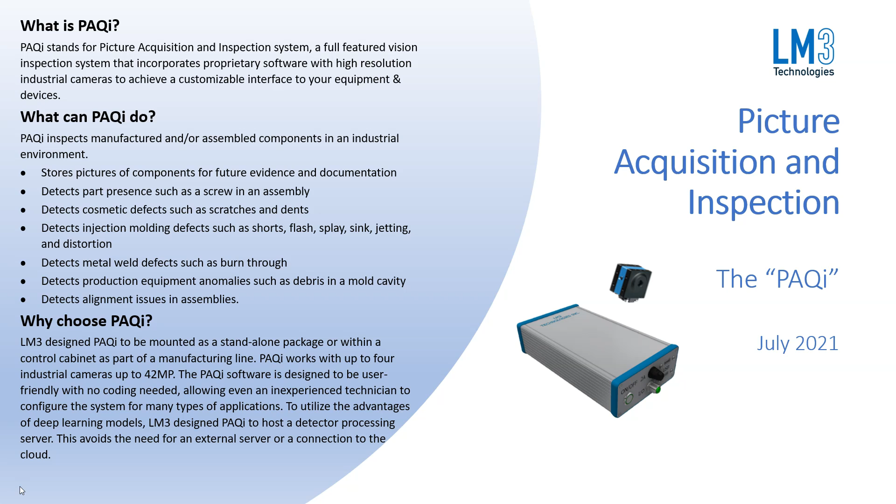The PAQi software is designed to be user-friendly with no coding needed, allowing even an inexperienced technician to configure the system for many types of applications.

So how does PAQi work? The initial setup can be achieved within minutes. The first step is to acquire images of your manufactured components.

Once images are acquired, they are processed through a program LM3 provides to label the images. After labeling, they are fed into an online training tool called QC Hero, using AI-based detectors that generate a trained detector capable of correctly identifying the labeled objects or images.

The trained detector is copied to PAQi, and a single button calibration is used to associate the detected objects with the expected objects in the images. This determines pass or fail. PAQi then operates on the line to do automated inspection.

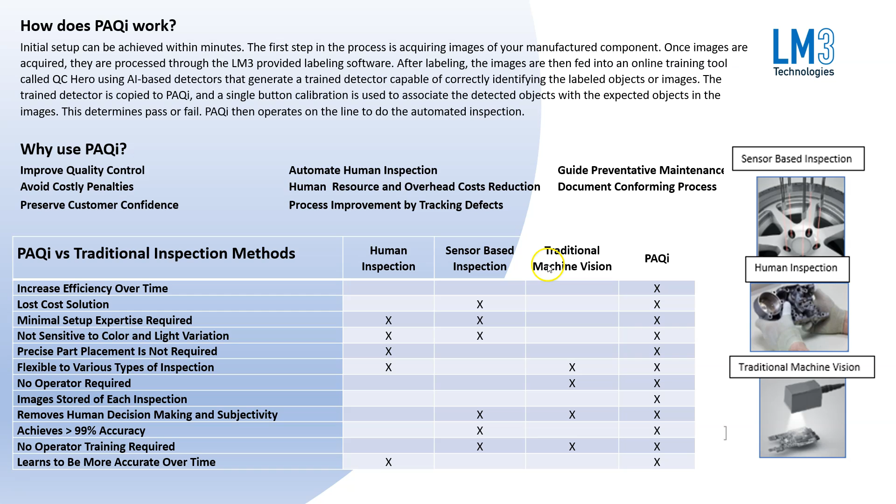Our customers include some very large corporations and some small ones as well, including Cooper Standard, Magna, Lear, Yanfeng, Bayer, Steelcase, CK Technologies, Cascade Engineering, and AGS, to name a few.

Here are the general system costs. A 10 megapixel single camera system starts as low as $5,500 with quantity discounts available. Additional industrial cameras, up to 6 total, can be added to the system for $750 each.

Because PAQi can do image acquisition using any kind of digital camera or DirectShow source, an inexpensive webcam can be used to reliably acquire images. Industrial types of webcams run at less than $150 each.

In order to do physical measurements, you will need to purchase a one-time NI VBAI license at approximately $850. QC Hero detector training is a pay-per-use web-based system at $20 per hour. A complex object detector usually trains in less than 3 hours, or $60 per session.

LM3 can be hired to do customization. LM3 provides affordable accessories including lighting controllers, I/O breakout boxes and cables, buttons, and LEDs to round out the system and avoid the need for high-cost integration.

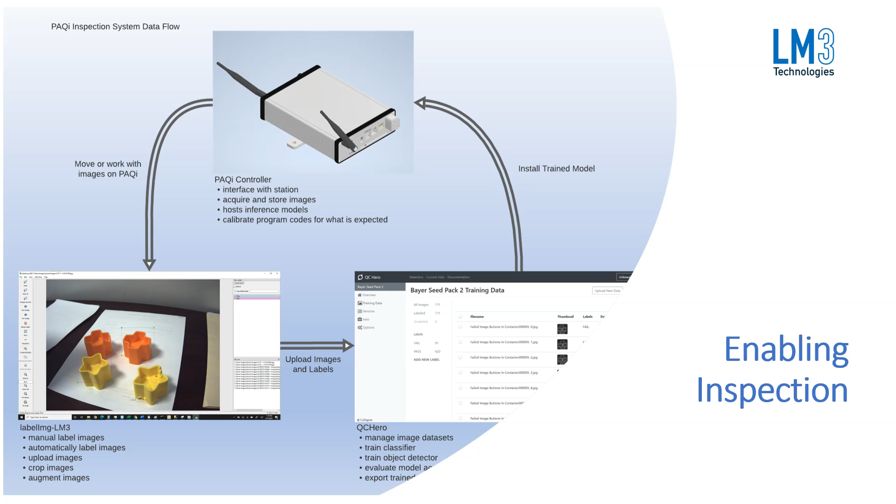The PAQi main components inside the controller are an Intel NUC Windows 10 Pro version with a solid-state M2 internal hard drive and up to 32 gigabytes of RAM. You can optionally load National Instruments VBAI to do traditional machine vision and measurements, and the system contains an onboard PLC which allows you to customize the interface with your production line or machine.

On the exterior of the PAQi controller are the ports for adding barcode scanners, cameras, network connections, mouse, keyboard, and monitor.

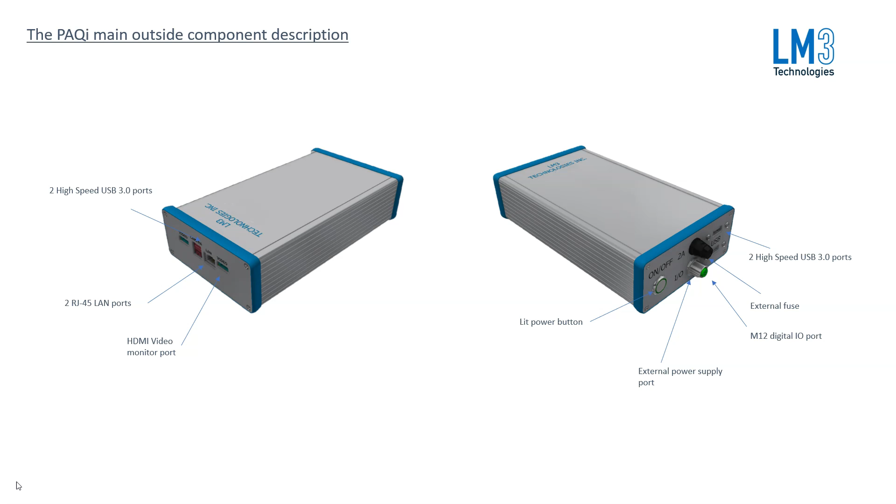As shown in this slide, you can connect the LAN port to the plant network to store images remotely and port into the machine for remote support. All internal components are fused for protection, and digital I/O can be connected to the M12 port, such as sensors, lights, solenoids. The ring light on the control box itself indicates the status of inspection, and an external power supply is used to power the unit so that any type of AC voltage can be used, whether you're operating in the United States or overseas.

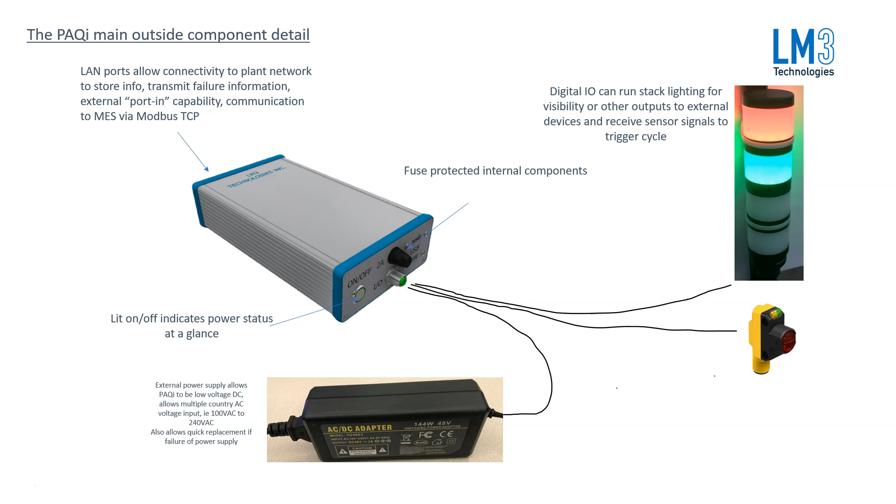Additionally, the video output port allows you to connect a monitor for applications where there's human interaction with the system. You can connect buttons and barcode scanners, and we also print labels on pass or fail. There's also the ability to connect to Wi-Fi, and of course Bluetooth support.

By default, the PAQi allows for up to 4 USB cameras to be connected, but the software will allow for 6 total cameras, which can be done by connecting GigE cameras through the network port.

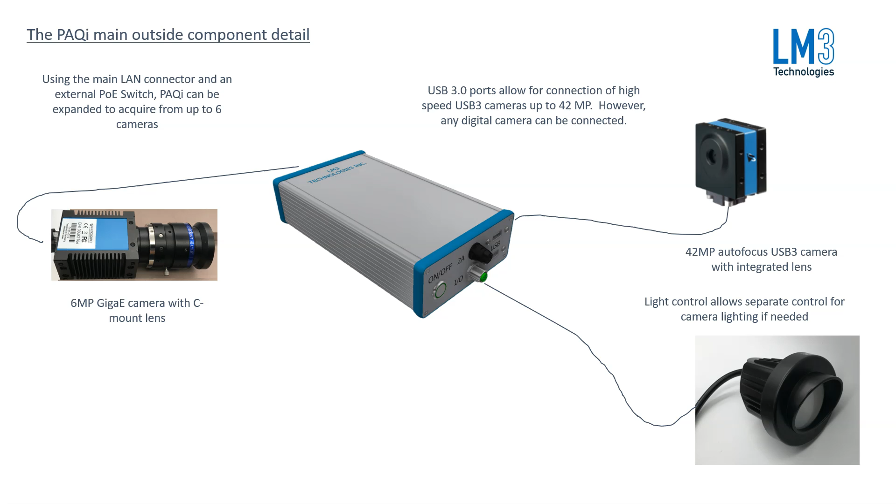This slide shows how you can connect various devices to the PAQi to run complete inspection in your production environment.

Regarding its history, PAQi was developed in 2017 as a way to create a containment system in a production environment. The goal was to have a camera, device, or system that when triggered would simply take photos and save them locally or over the network. The second goal was to link the photos to the production for traceability.

This was initially designed to be triggered by the scan of the product serial number, resulting in an image stored by that serial number. The purpose of this was to have traceability pictures for the customers as proof of assembly and assistance in problem solving. Many other cases were similar, and the pictures were named by a unique serial number, commonly referred to as warranty photos.

The third objective was to have a unit that could break the price barrier of traditional systems. Current vision systems are expensive, and by reducing the cost of hardware, customers can deploy machine vision analysis across a wider range of applications, leading to a quality-controlled standard.

The system would have to be simple enough and low cost in such a way that if there was a failure, it would be quicker to unplug the unit, install a new unit with the program, and be back in production very quickly. The system would have to be able to handle multiple cameras as well.

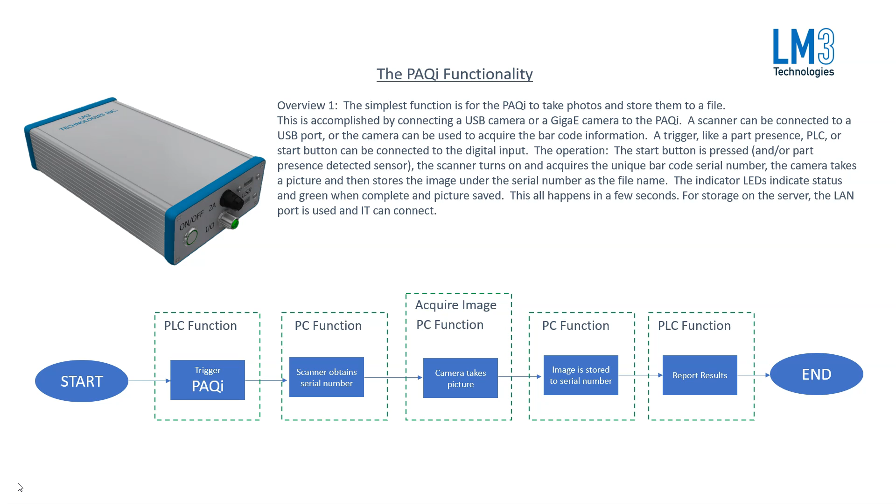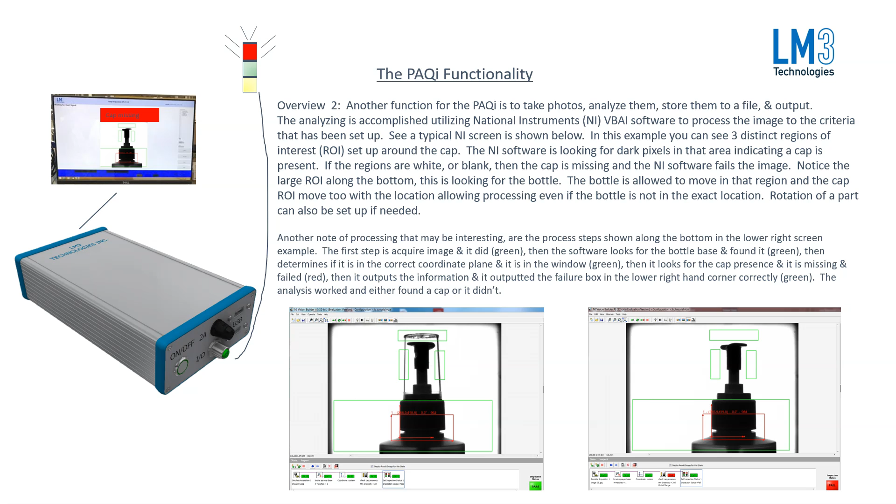In inspection mode, PAQi waits for a trigger as usual, scans or generates a part number and serial number, acquires an image, and passes the image to either VBAI for traditional machine inspection or to a detector for it to return the objects found based on how the detector was trained. Those results are returned to PAQi, at which time PAQi determines pass or fail. The image is stored along with the results, and the monitor is updated to report the results.

Since the PAQi has multiple camera capabilities, it can take warranty pictures with some cameras and analyze pictures from other cameras. There are cases installed where 2 cameras are taking warranty pictures and 2 cameras are taking pictures and analyzing them, whether using a detector or VBAI.

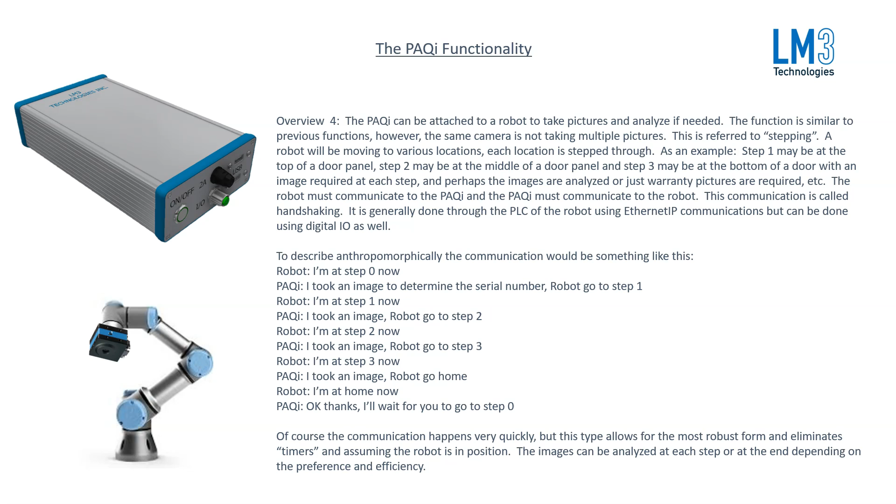In the latest version of PAQi, you have the ability to set up jobs and count parts as they're being inspected, and automatically stop production when the number of parts exceeds or is equal to the expected count.

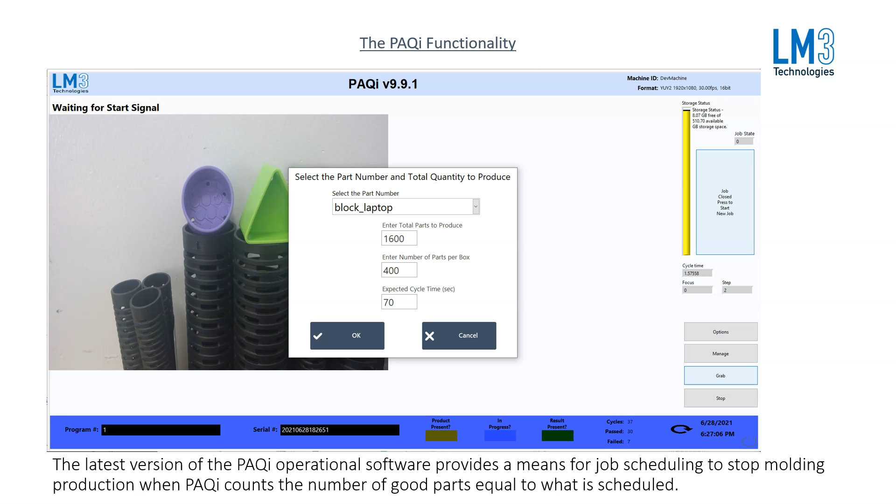In the production count mode, the PAQi can sense when the cycle time of production exceeds the expected cycle time and require the operator to select a reason for the downtime. This allows us to track downtime across the entire job and report OEE metrics.

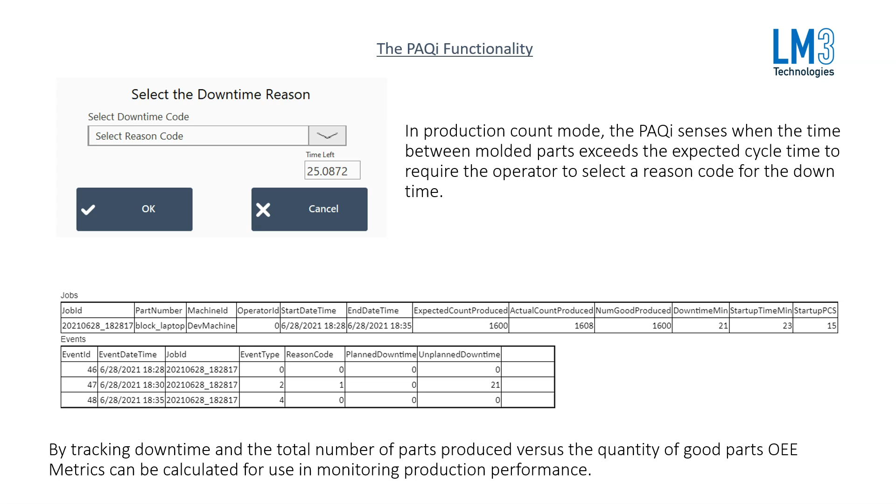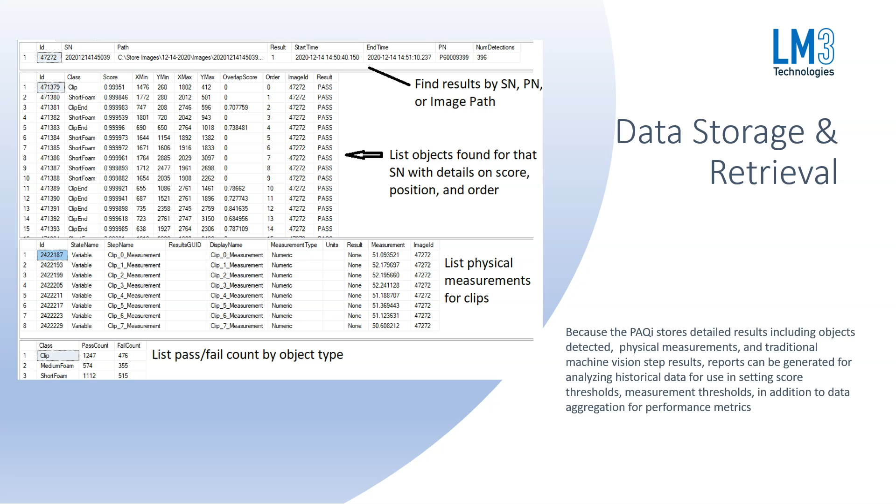Under all circumstances, PAQi stores results to a SQL server, whether it be local or one on your network. All individual step results, whether it be from VBAI measurements or detectors, are stored by their score or their measurement value in reference to the image that was taken. This allows for more advanced analysis of production performance.

PAQi is used for a multitude of inspection requirements, including feature presence, defect detection, color classification, physical measurements, and traditional machine vision operations, as well as a combination of object detection and classification, and object detection and object measurement. In the following slides, I'm going to go over some of the use cases of PAQi.

To start, I want to provide an example of how QC Hero for deep learning detector training works. QC Hero is an online training tool which allows you to train multiple detectors simultaneously. This tool provides a means of continuous improvement in detector management. Using this tool and the configuration tools available in PAQi allow you to be completely self-sufficient and manage the entire PAQi system on your own.

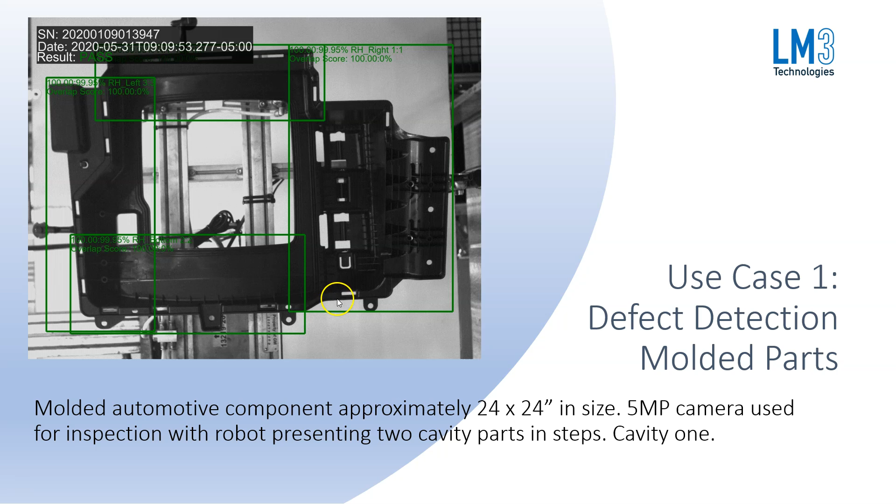With that said, use case 1 that we are showing is defect detection on molded parts. This molded part is approximately 24 by 24 inches in size, so a rather large part, and we're inspecting for defects using a 5 megapixel camera. So this is a 2-cavity mold, and we inspect the left side and the right side in series.

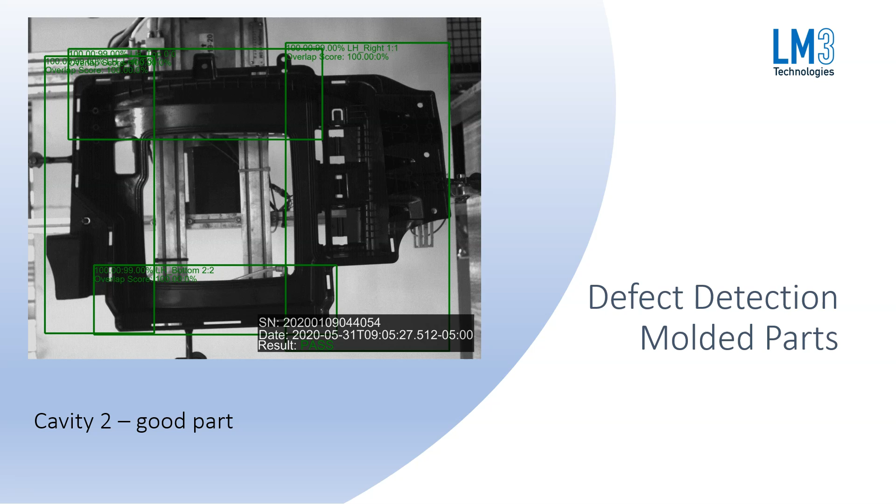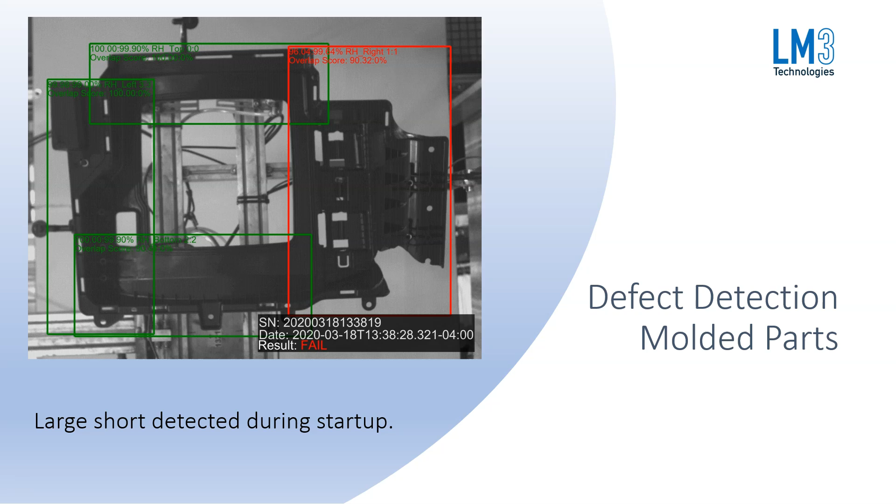This is showing cavity 2 as a good part. In this image, there's a large short. This is most likely during the startup of the press. Quite easy to detect.

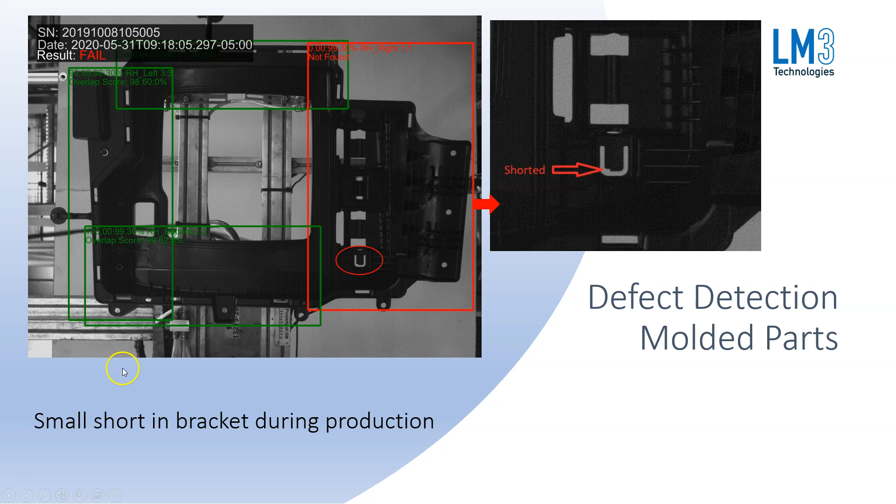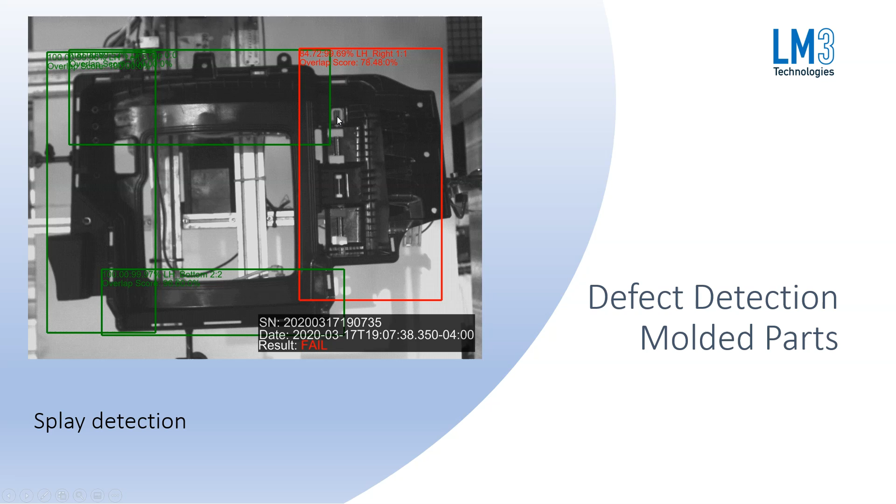Smaller defects, such as this little short on this bracket, on this part, are also caught by PAQi. In addition, PAQi can detect splay. So in this case, these brackets towards the center and this smaller bracket that we just showed with the short have splay on them, and the part is rejected.

The advantage over other systems is that one camera can be used to inspect the entire part. Traditional machine vision systems are unable to detect variable defects anywhere on the part because usually they have to be pointed in one spot of the part where you expect the defect. We all know that molding produces defects in completely unexpected locations at times.

We also do not require special lighting because the detector training system is able to change the lighting for different scenarios. And this is rather fast. It's not for high-speed type production, but we can do an inspection of a large part like that in less than 3.5 seconds, which is plenty of time for molding machines.

Plus, the nice thing about PAQi is that the system gets smarter the more you train it.

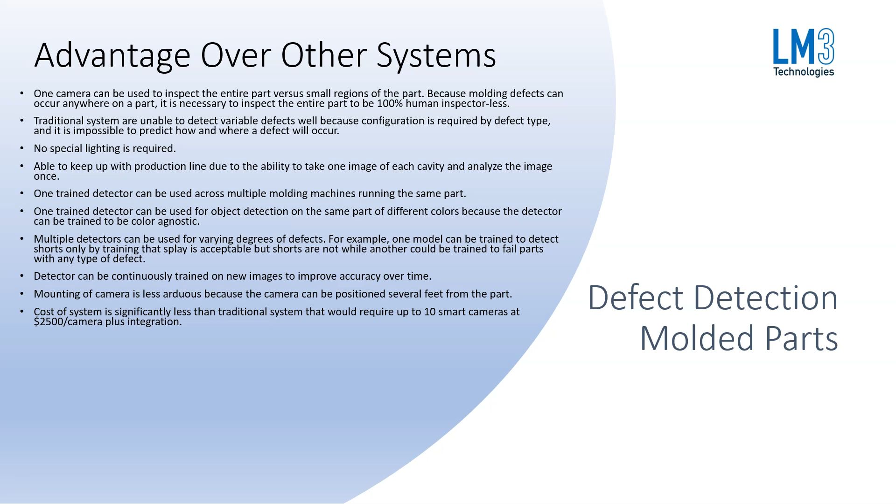The next use case is parts presence for hog rings. As some of you know, this is a pneumatic-based tool, and there's no way to sense for sure that the hog ring has been properly assembled to the part. So in this case, we have a bolster with an airbag in it, so it's a safety-critical part, and it's necessary to know that all 5 hog rings are in place so that the airbag deploys properly.

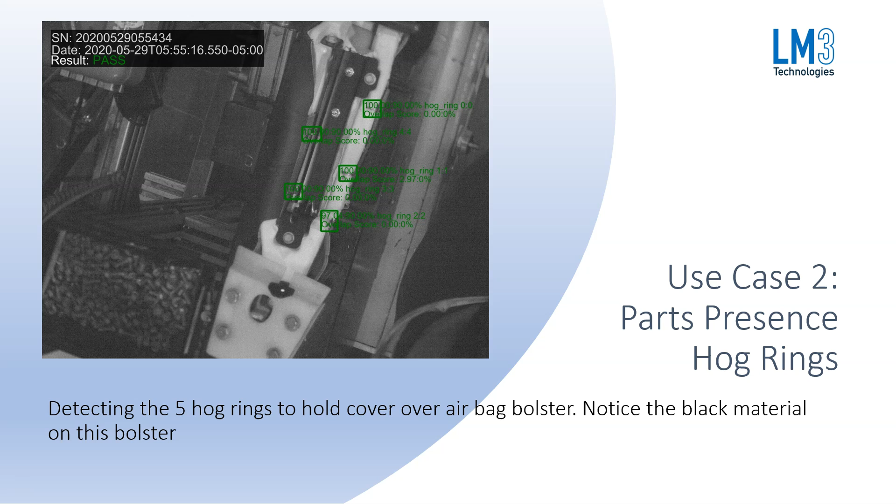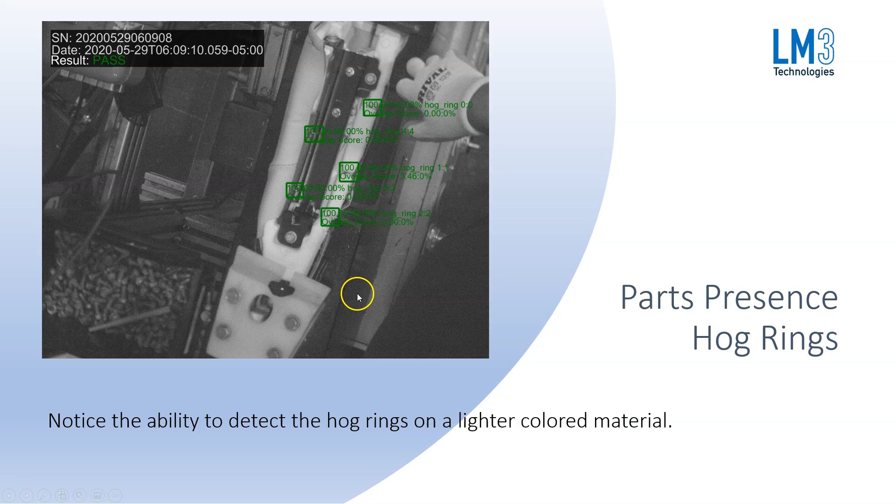Notice the ability to detect the hog rings on lighter colored material versus the darker one in the previous image. We're also able to mount a single camera, also 5 megapixel in this application, on the overhead structure to look down at the part as the operator is assembling the hog rings. You'll notice in this slideshow that the operator assembles the hog rings and eventually clears the field of view with all 5 hog rings in place, and the inspection passes over here on the far right.

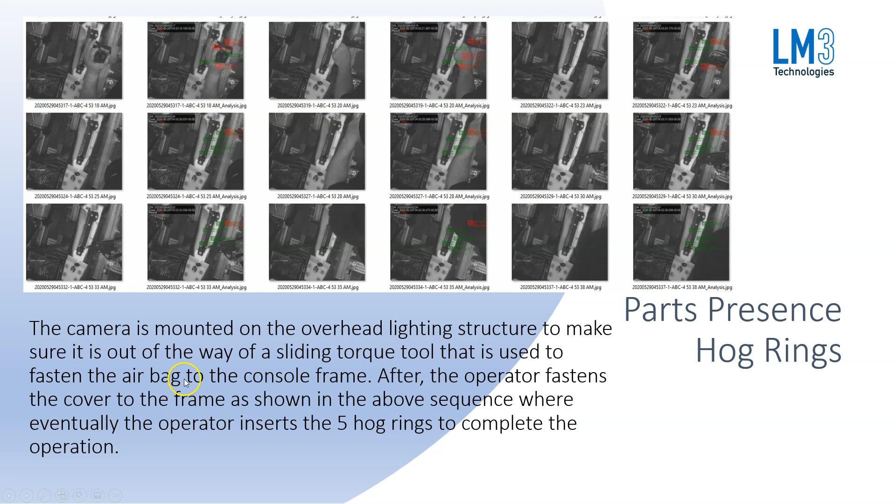One of the main advantages of our system versus traditional machine vision systems is the ability to use one camera at a long distance to detect multiple objects. Typically, integrators would use up to 5 separate cameras to detect the 5 individual hog rings, but then there's also the issue of where you place them to stay out of the working area and still be able to see the hog rings well enough to do inspection.

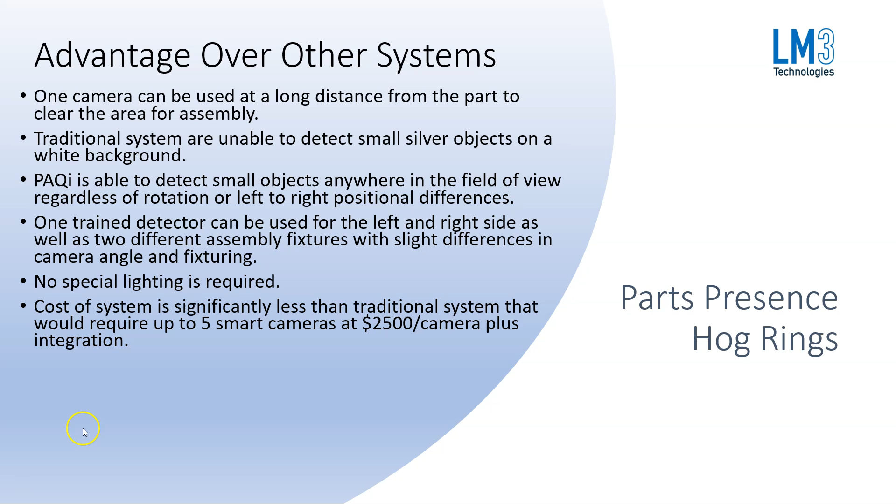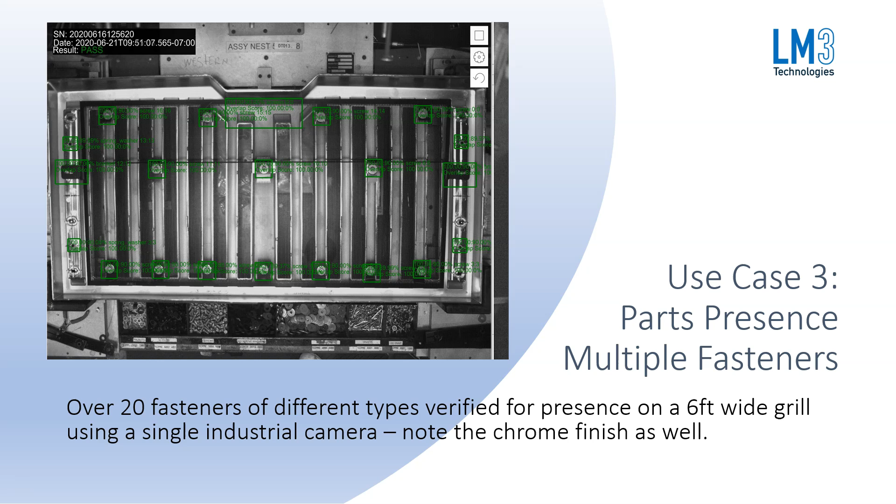Use case 3 is very similar, but it's sensing multiple fasteners versus multiple objects of the same type. So this detector has been trained to sense screws, clips, brackets, and bug screens on a very large grill. Now this is a very large field of view, over 60 inches wide, using a single 10 megapixel camera, also on the overhead structure so that it's out of the way of the operator.

So the advantage of this system, again, is that we can use one camera out of the operator's working area to detect multiple small objects, and we can also use it to do layered assembly, such that we verify that the operator completes certain tasks before moving on to the next steps.

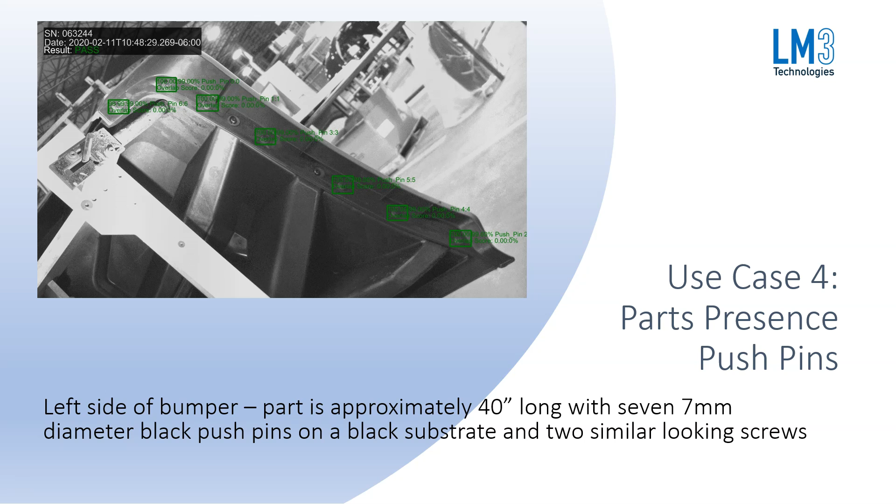In this use case, we're doing something similar again with parts presence, but in this case it is black push pins on a black substrate. We're also detecting several of these, 7 push pins on both the left and the right hand side of the part. Now, this is a very large semi-truck bumper, so being able to do this with one camera is quite amazing.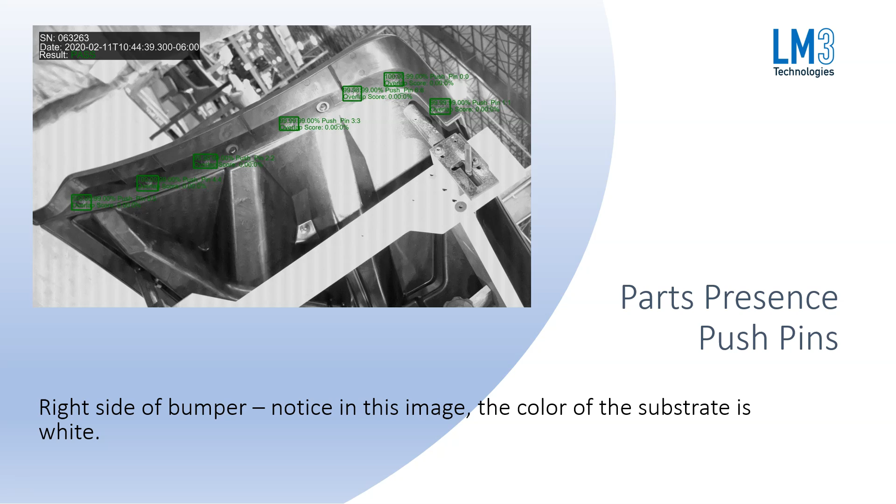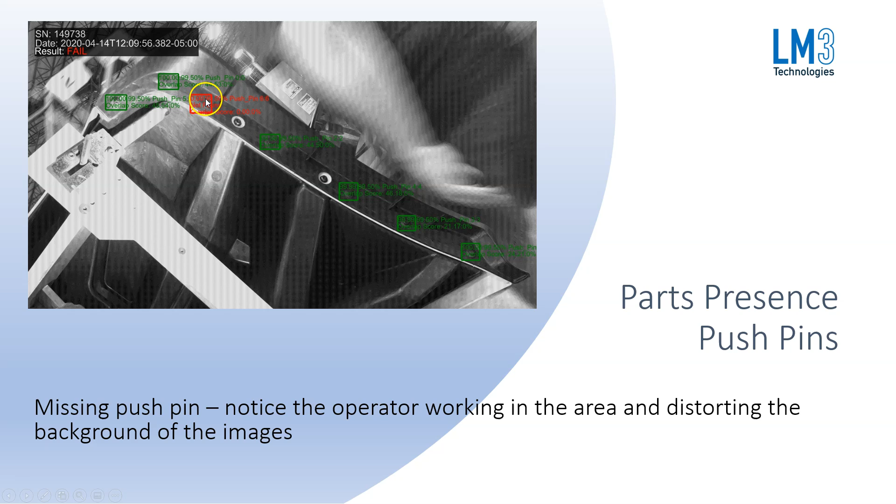Notice here that the system is able to detect a missing push pin where the red box is shown, and in this image it's able to detect that one of the push pins is not pressed in all the way.

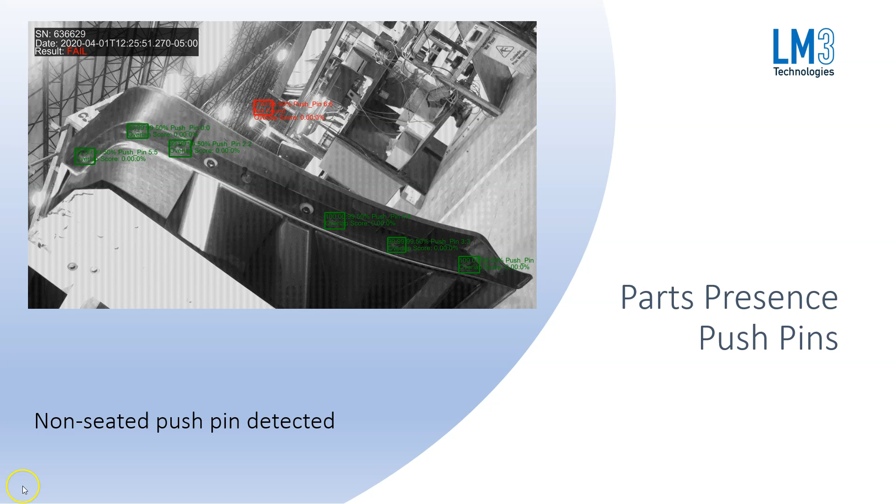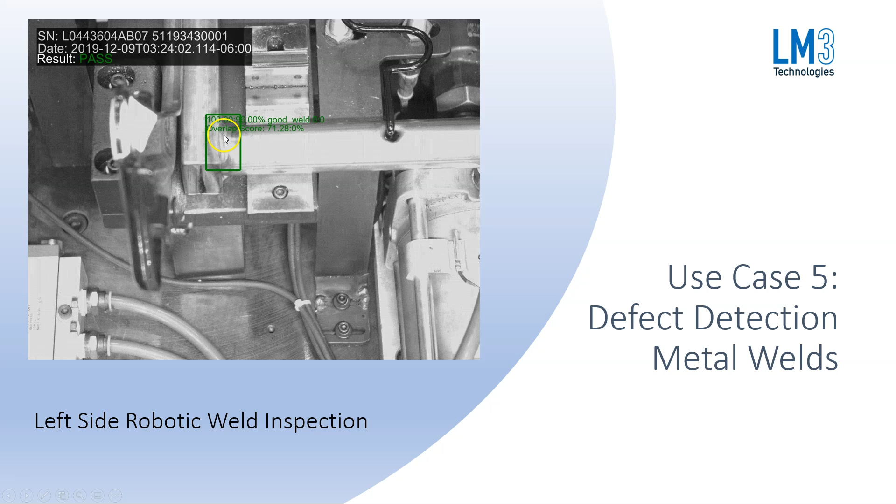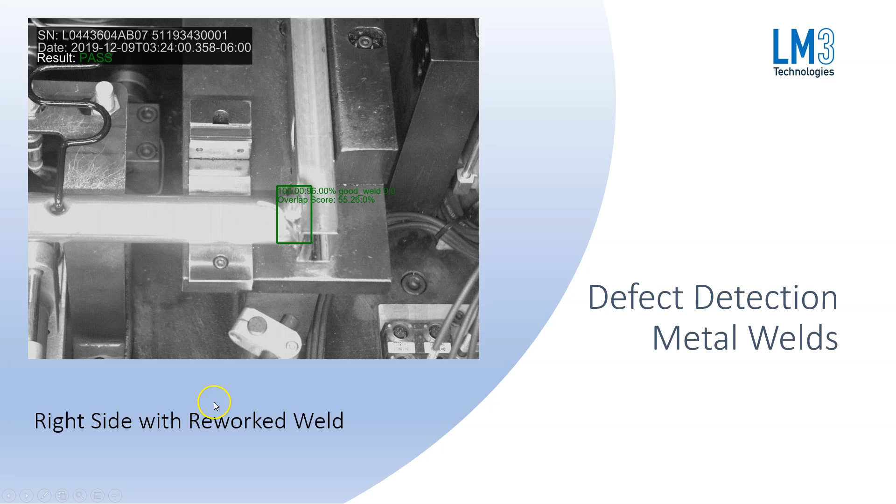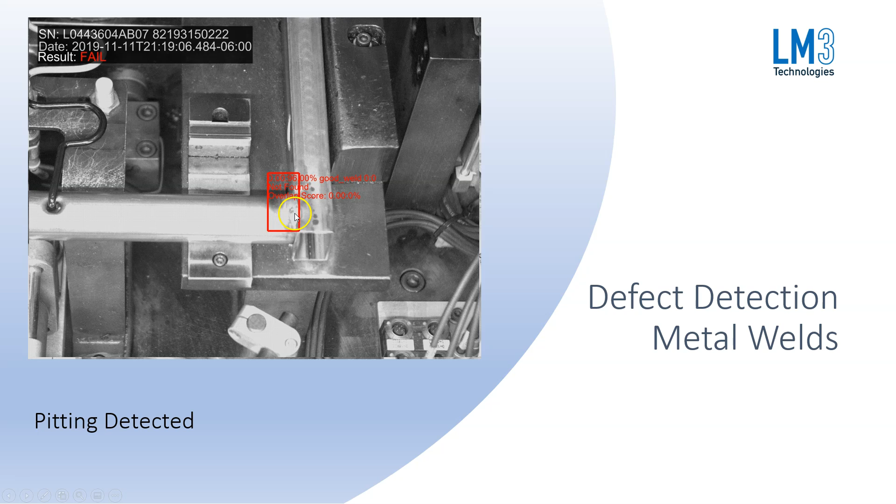Again, there's no special lighting required for PAQi. We're just using standard overhead lighting. In this case, there are multiple settings on the overhead lighting, so we train the system to detect the difference in lighting and what to consider okay and not okay. Again, we're also mounting the camera overhead so it's out of the way of the operator during assembly.

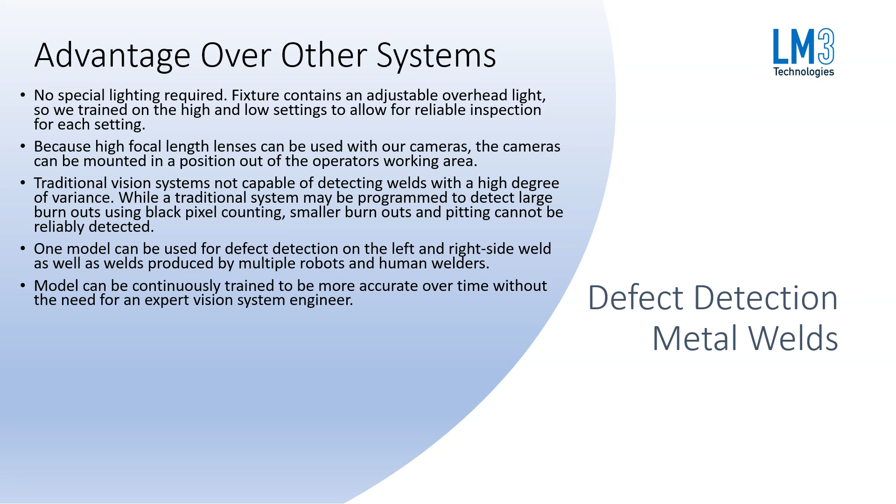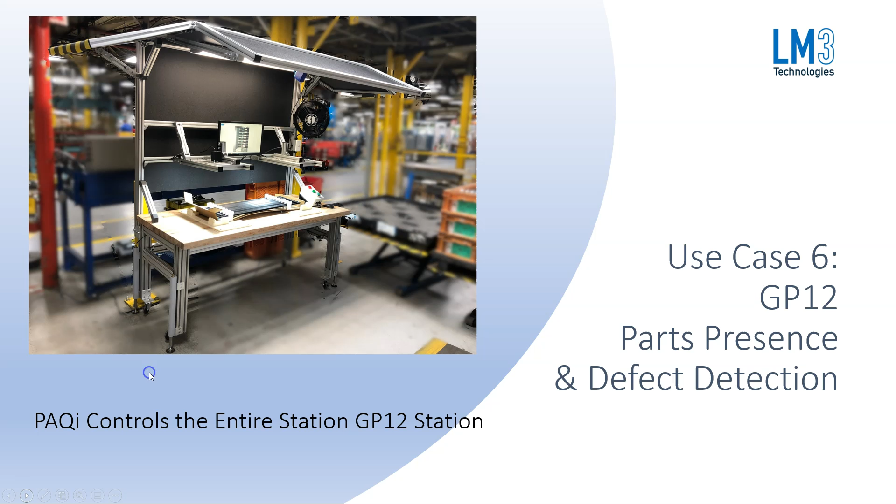As mentioned earlier, PAQi comes with accessories that allow you to connect buttons, sensors, lights, and solenoids. In this view, you have PAQi with an I/O breakout box and a separate lighting controller.

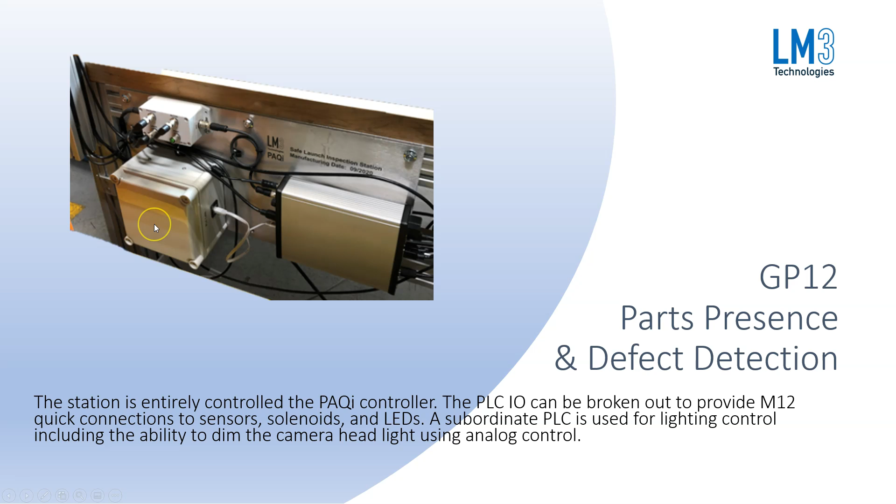For this application, we need to precisely verify that pieces of foam and clips are present on eight parts introduced to the station. In this case, we use special lighting to make sure we have a very good view of the end of the parts.

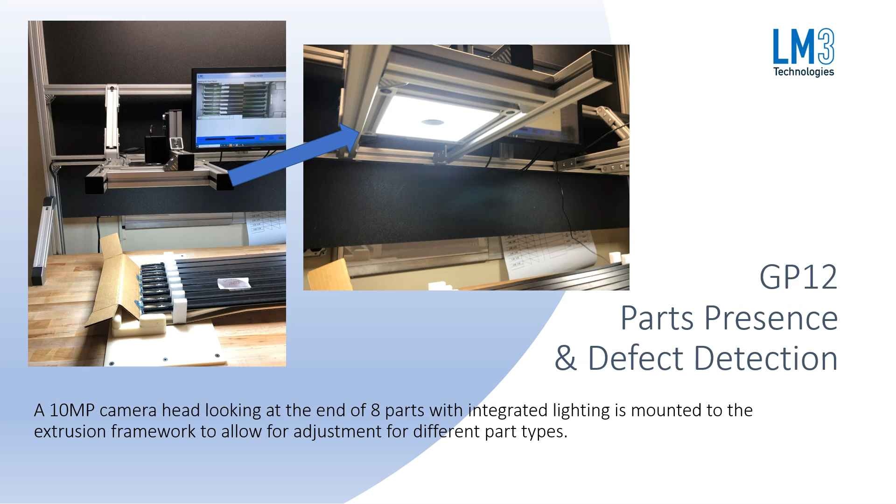As shown in these images of the actual GP12 station running, we verify that a medium-sized piece of foam is present, that a small piece of black foam is stuck to the top of the medium-sized foam, and that these clips are present in the right location.

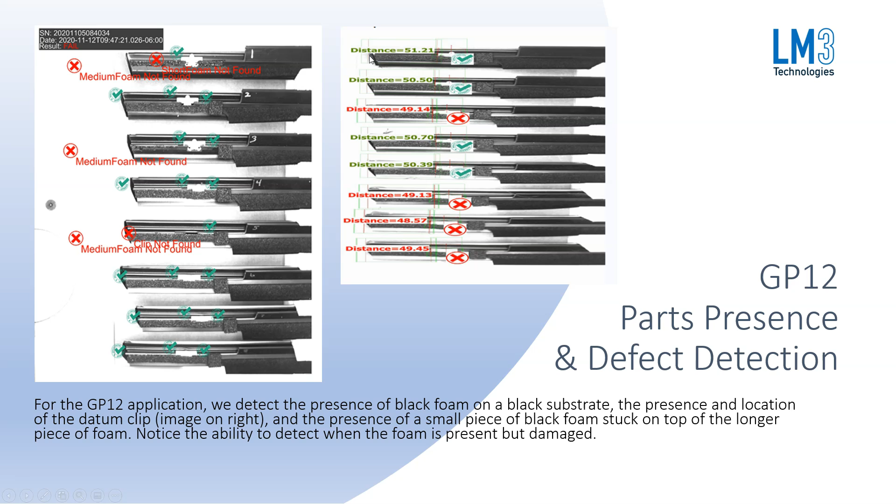In this particular application, we're able to find these objects, verify their presence, then feed them into VBAI to do measurements from the center line of the clip to the extreme end of the part to verify the clip is in the right position, considering it's a datum.

This application also works with the operator to allow correction of not-found objects that are okay for shipping to the customer. So if PAQi were to find that the foam did not meet its standards on part number 3 from the top, the operator could visually inspect the part and press on the defect to change it from bad to good, or vice versa.

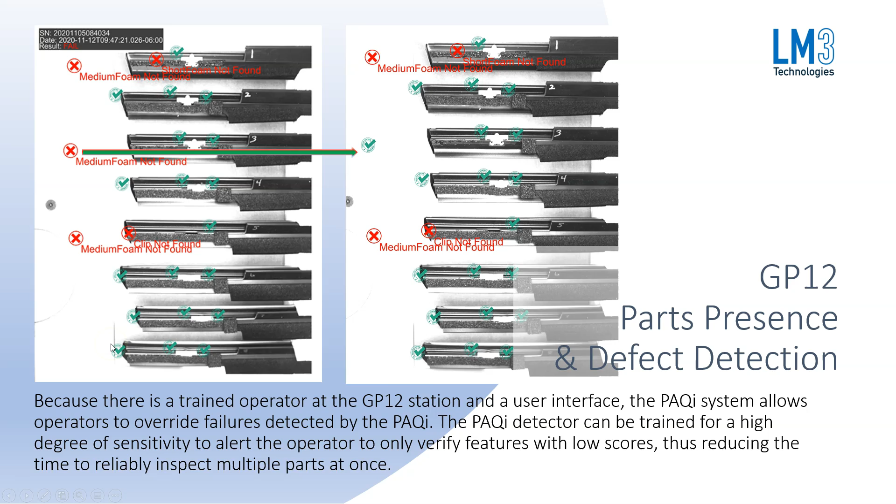Because all of the inspection data is stored to SQL, it's especially useful to run reports after production completes on GP12, to report all failures found and work the system upline to improve the manufacturing process.

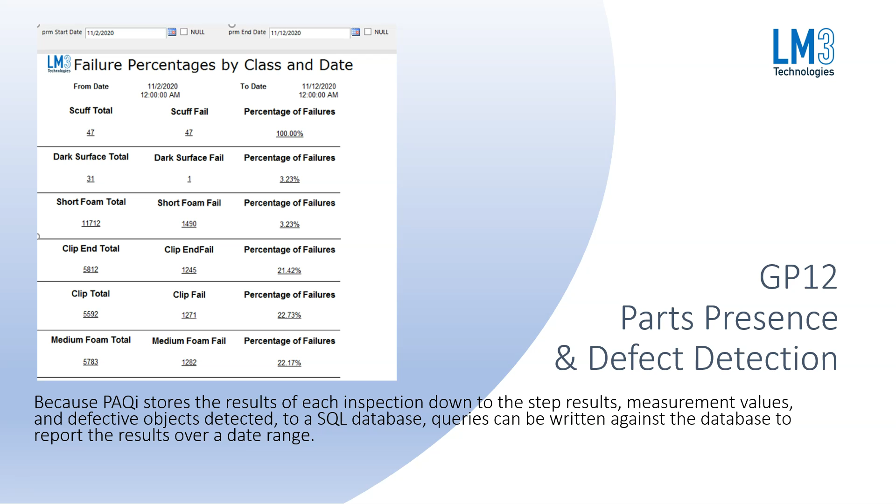Using PAQi for GP12 or safe launch applications saves money in several ways. It reduces the number of human inspectors by doing basic inspection of parts present on multiple parts at once, and improves quality control to shorten the containment time.

It eliminates any customer paybacks, reduces scrap, and is up to one-fifth the cost of non-comparable but competing vision systems. This in essence reduces your launch time and saves you money by having a shorter period of containment.

Plus, the system gets smarter the more that you train it, and allows you to dedicate your human resources to the production system itself and improving it, to reduce the number of defects that reach the end of the line.

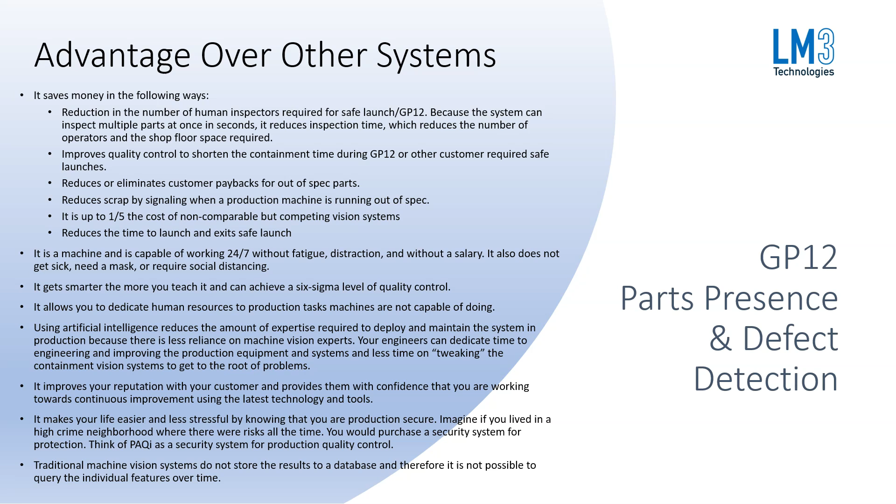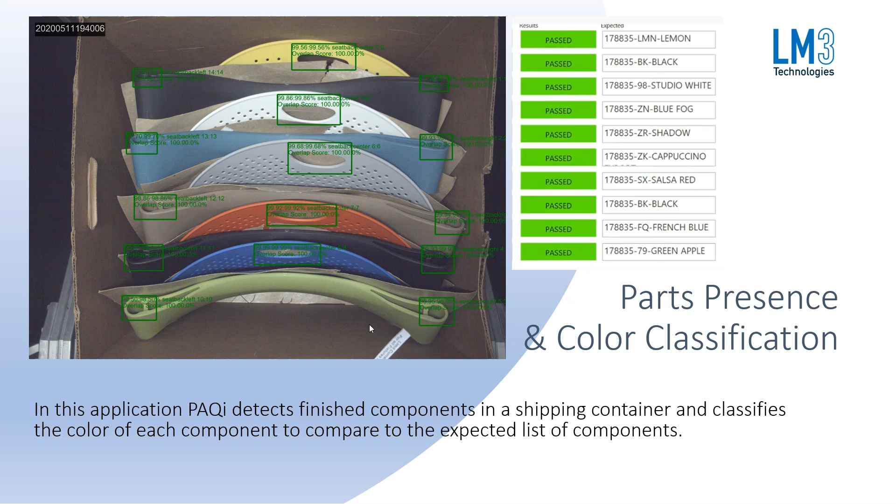In this application, PAQi is used to find each object, even though it can be in the box at different angles, left and right, twisted. So first we find the parts, and then we take the found section of that part and feed it into a classifier to classify the color of each part and compare it against what is expected in the box.

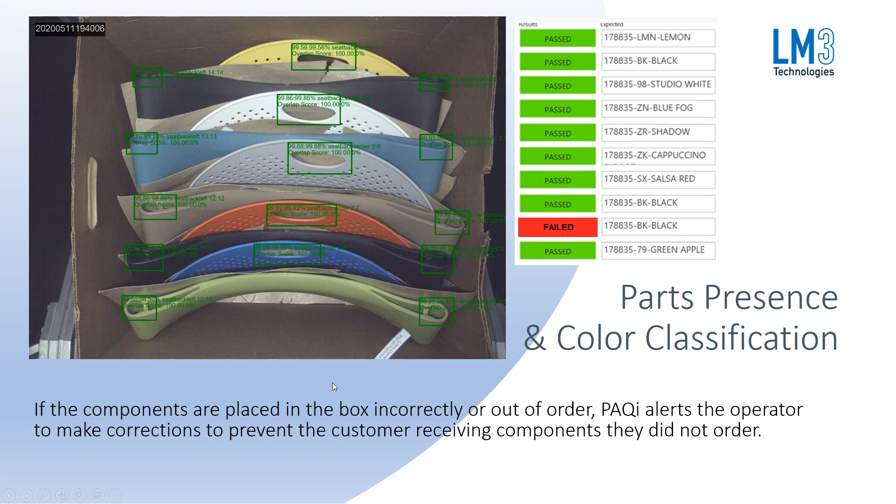For instance, if the second from last part from the top is a blue part versus a black part, the inspection fails and the operator is notified to correct the bad part in the box.

One of the advantages in this case is that PAQi, because it has an onboard PLC, can control the entire station, including feeding the box into the light booth.

Another advantage of PAQi is its ability to control the entire station, because you can connect a monitor, mouse, keyboard, barcode scanner, and control motors and solenoids. PAQi can be the central controller for the entire station, which it is for this particular application.

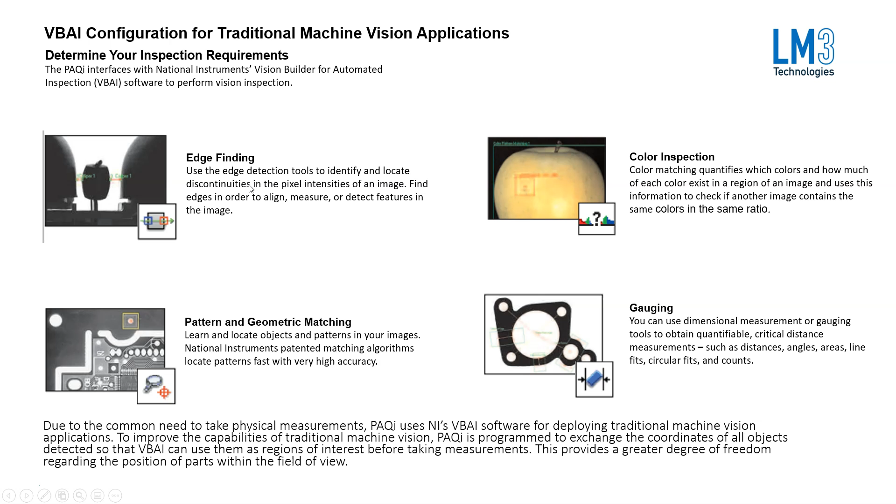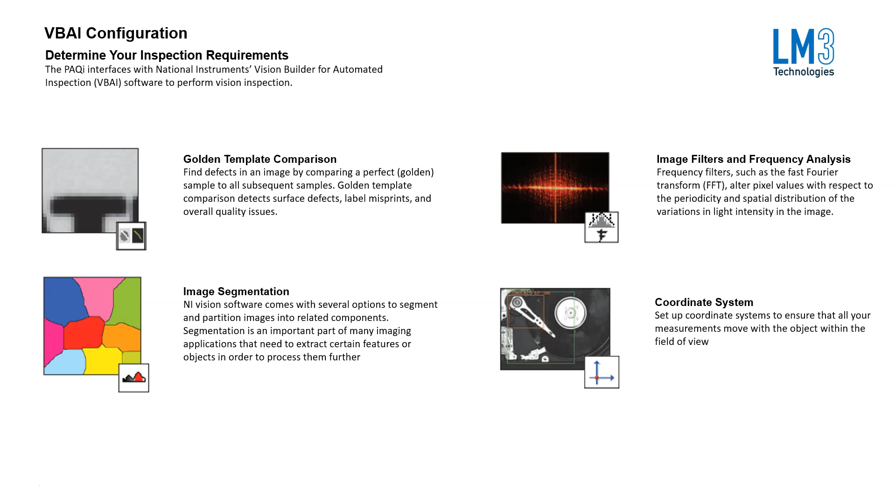Now I'm going to get into some of the standard features of VBAI in the case where you would want to do physical measurements. VBAI can be used for edge finding, color inspection, pattern and geometric matching, gauging, golden template comparisons, image filter and frequency analysis, image segmentation, and coordinate systems as well.

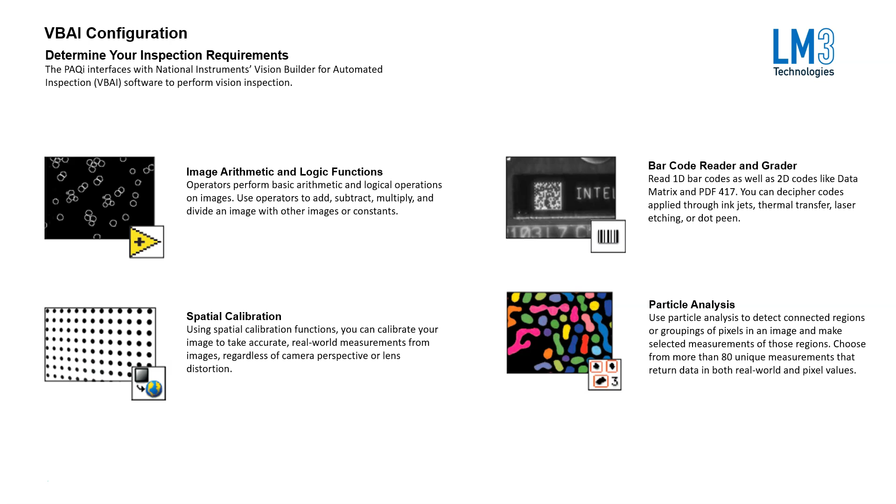This is pretty standard stuff as far as traditional machine vision goes. It's been around for a long time, and all systems operate similarly, so I'll go through this fairly quickly.

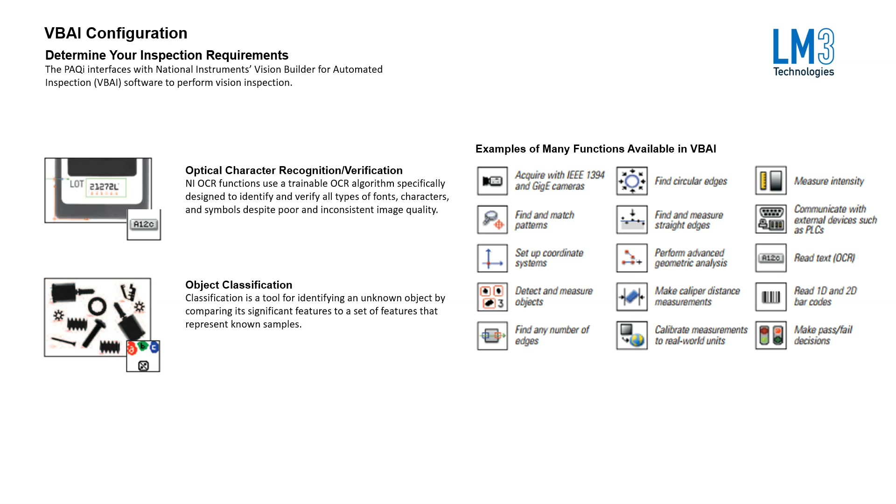Here are the functions in VBAI that are strung together or sequenced to make up a complete inspection. The advantage of the detectors is that the machine does all of this for you. But in cases where you need to provide physical measurements to your customer, we use VBAI in combination with the detectors.